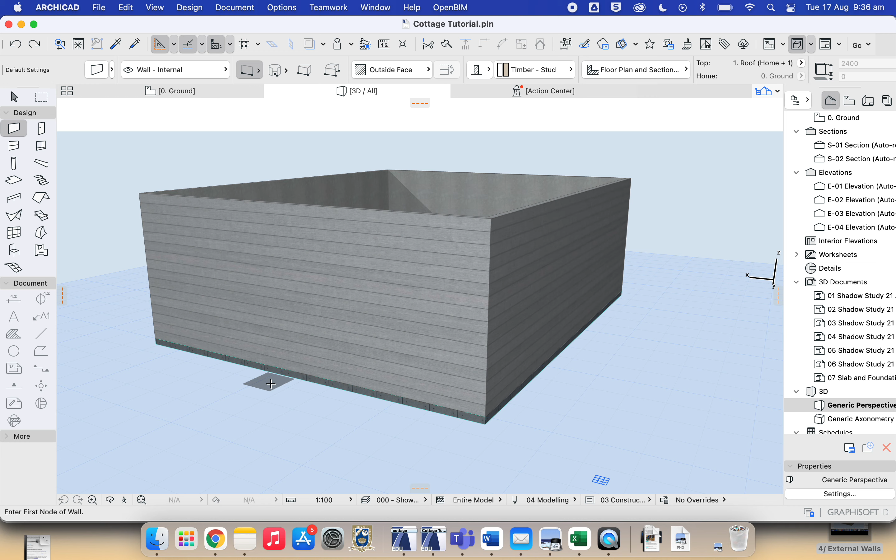Welcome back. In this tutorial we're going to insert our internal walls on our cottage. We've already done our externals, they look good. Now let's move on to our internals.

So go to our working drawings. First, in our specifications, the external walls were 90mm thick by 40, and the internals are thinner, at 70 by 35, with a timber rating of F5, less than F8 for the exteriors. This is because they don't need to be as strong, as they're not load bearing. They don't hold or support the roof.

The internal walls in this case, you can see one running along here and also one here, are purely there to partition our rooms from each other. They're not structural.

Over here, we can look at the dimensions to see where we need to insert our walls. You can see this figure at 90 is the thickness of our external wall. Then from the inside edge of our external wall up to this point, which is our internal wall, that is 70mm thick. The distance between these two walls is 3950, measured from the inside point of this 90mm external wall up to the lower face of this internal wall. So now that we've got that 3950, let's move over to ArchiCAD.

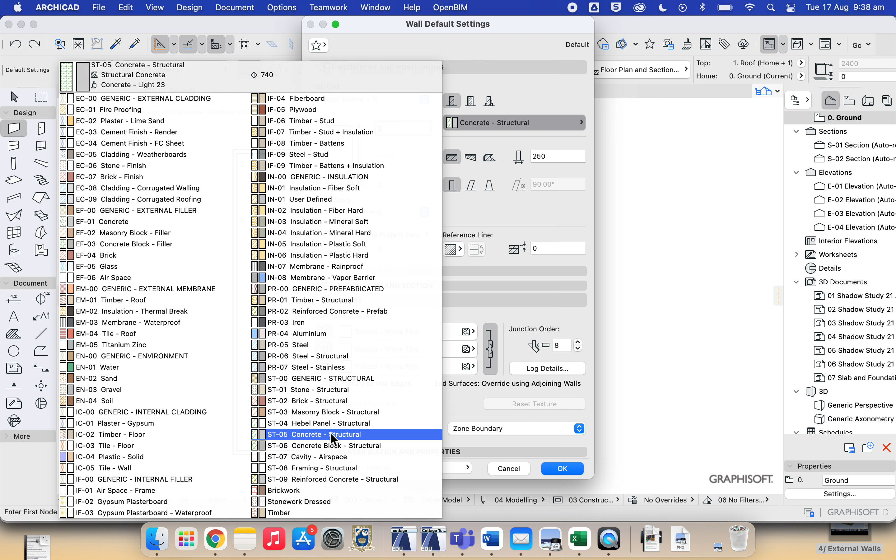Instead of concrete structural, which is what it would have been set on for the externals, let's move up and find timber stud for the internals. Make the timber studs 70mm thick because it's what it said on the drawings.

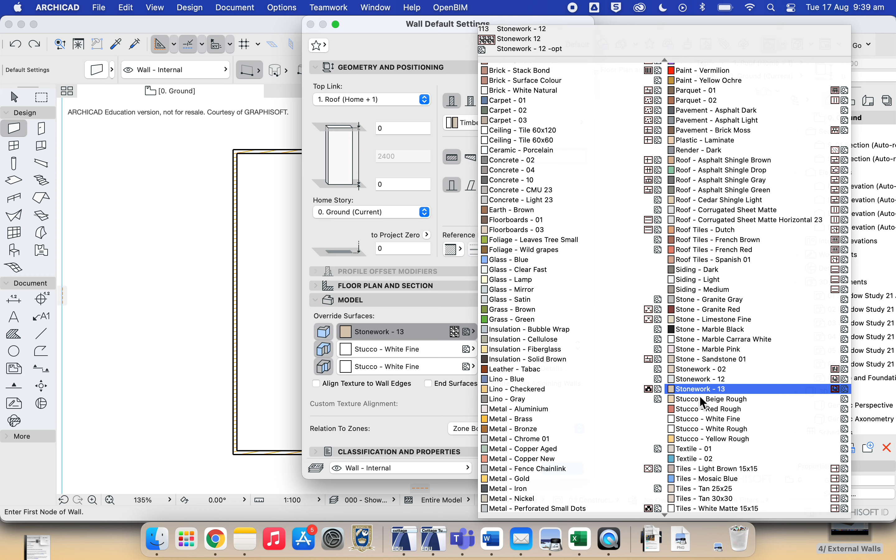Let's move down, keep the reference line as is, and come down here to model, select model, make the top one white stucco, which is the plaster style, and use the chain to link them all so they're all white stucco. Remember, these are internal walls, so both sides will want to be plaster style because they're both walls of one of the rooms on the inside.

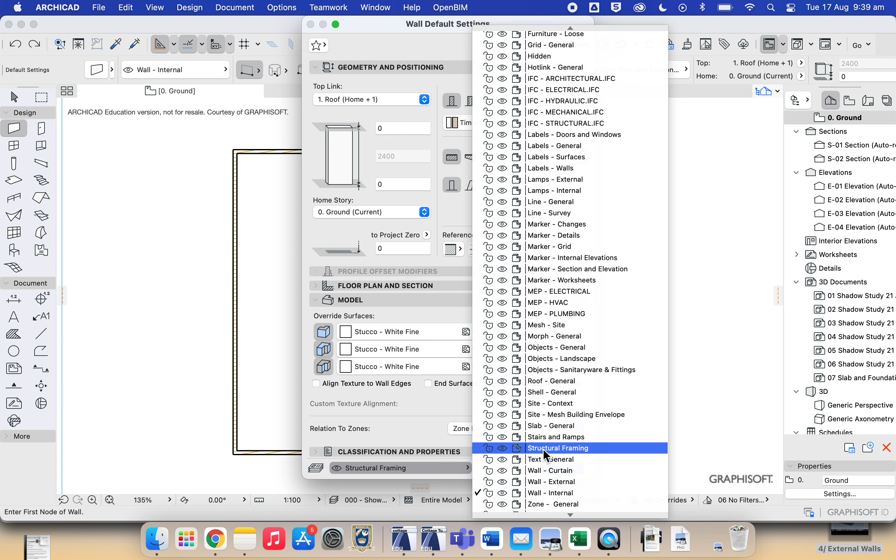Come down, and in the layers section, it may have already been set to wall external. I need you to change that. Move down and find wall internal, so we have an internal layer. Click OK. Now here we are at our diagram.

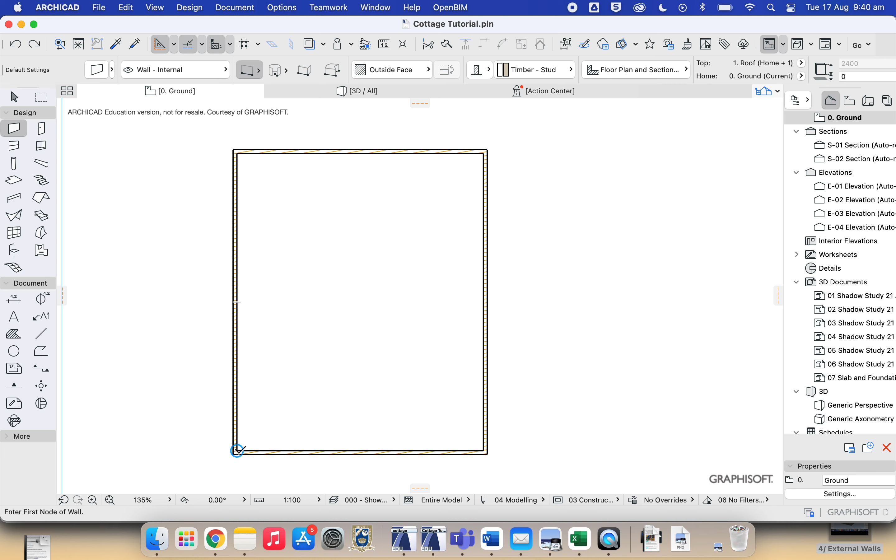You need to come over, and 3950 is our dimension. Come to the inside point, let it snap like that. Start dragging your cursor up the wall, just enough so the software picks up that we want to do something with this wall, and hit D.

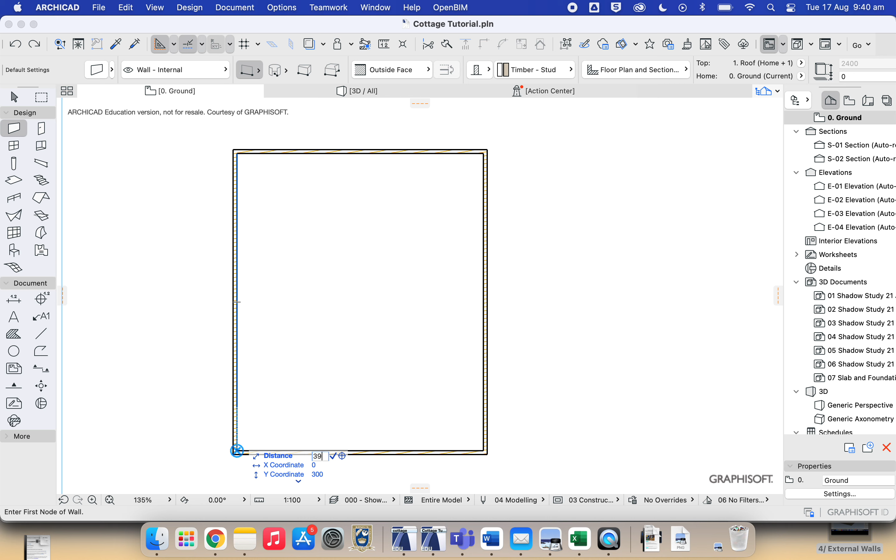You can see the distance right there is 300, but hit D and we can edit that, so D 3950 is what we want from that internal point. Hit enter, and you can see it brings our cursor up to this 3950 point, ready to begin our wall. All we have to do is start dragging.

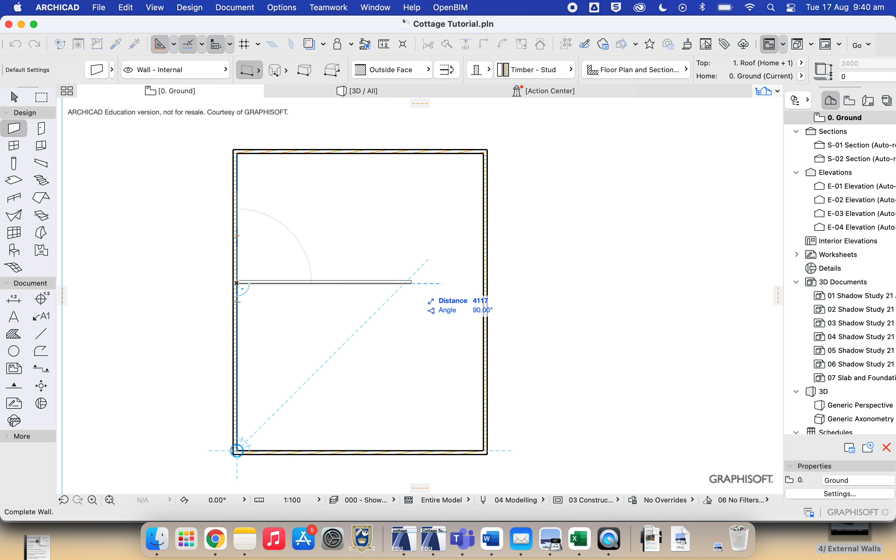You can see there's our wall. Make sure the reference line is at the right point, which is the bottom. If you have it this way, our wall is going below the reference point, so the gap between the bottom wall and this wall is going to be less than 3950 if we take it that way. So flip it, make sure it's the right way up.

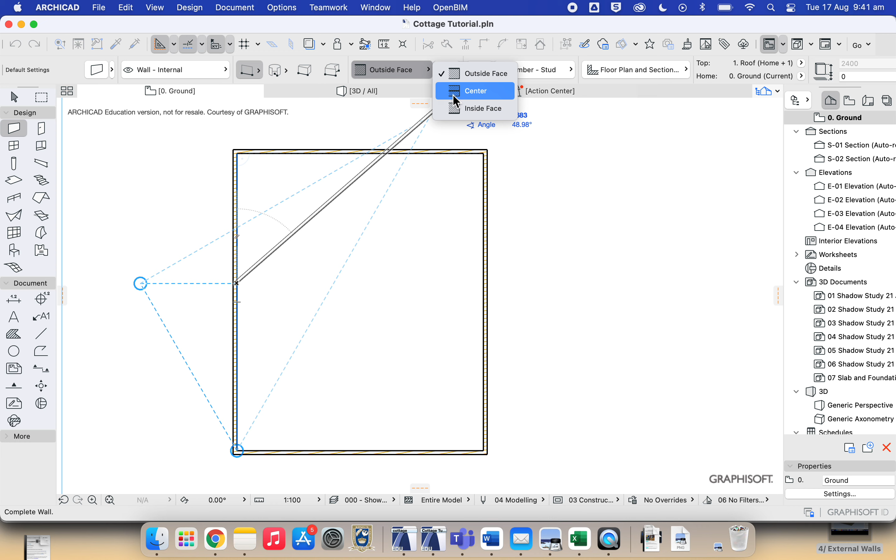If it isn't the right way up, you can come up here and change it, the outside face for the reference line, you can change it to the inside face and that would flip it, but we don't need to do it. Bring it across, make sure it's snapped in at 90 degrees, and I want you to bring it past this external wall, out somewhere over here, and click. And there we have our wall has been drawn.

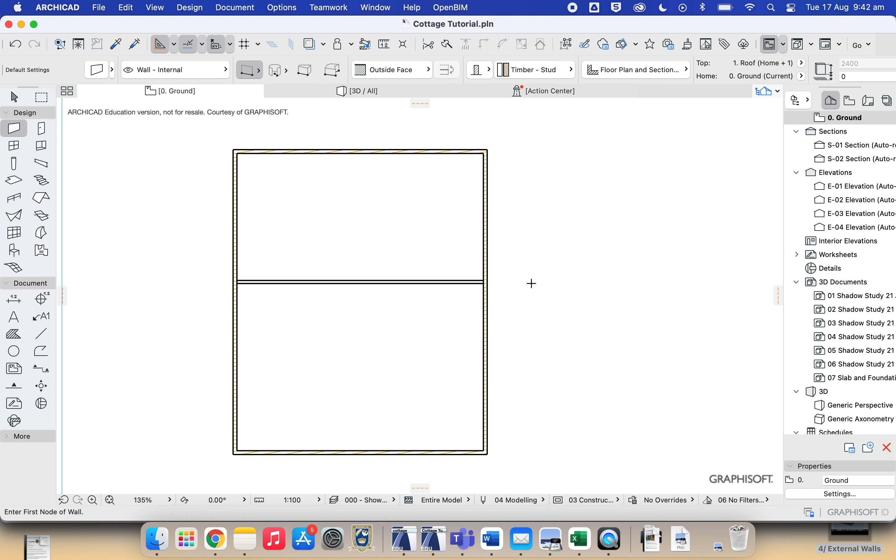Now let's do the same for the second wall. There's going to be a wall coming somewhere down and through here. So let's get our dimensions. Go back to your drawing. This wall is what I'm talking about. We need to see how far from the left or the right we need to begin drawing this. So come down here.

70 mils, this represents the internal wall we're just about to build. Let's go from this corner over here, from the inside of that wall, it's 3600 to where that one begins. So remember that, 3600.

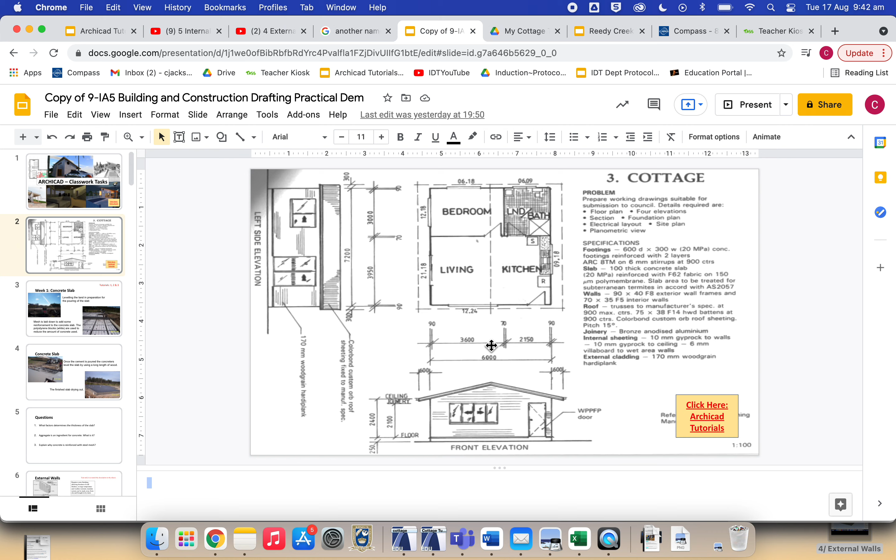Flick back to ArchiCAD, come up to that point over here, let it snap. Don't click, just start to drag. The software recognizes that we want to work along this wall. Hit D, and we have a distance here which we can modify to 3600. Enter.

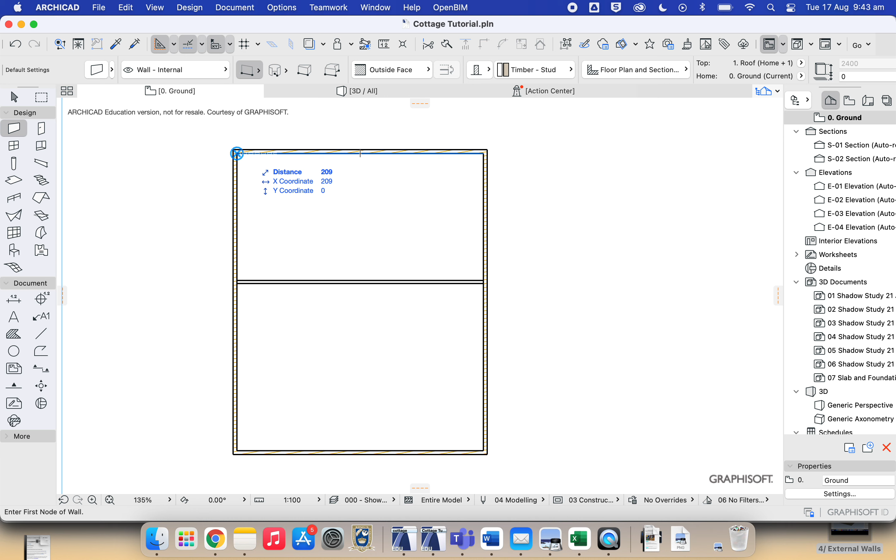Oh, it hasn't done that. Escape, escape, let's try that again. Come back up to this point, let it snap in. Send it across a little bit, there we go, hit D, 3600, enter, there we go, it's automatically recognized it.

Now we start bringing our cursor down, you can see the wall is on the right side, it's not flipped like that, it's like that, so the distance is going to be 3600. Bring it down past it as well and click. Come up, take your trim button, select the part we want to trim and trim it back.